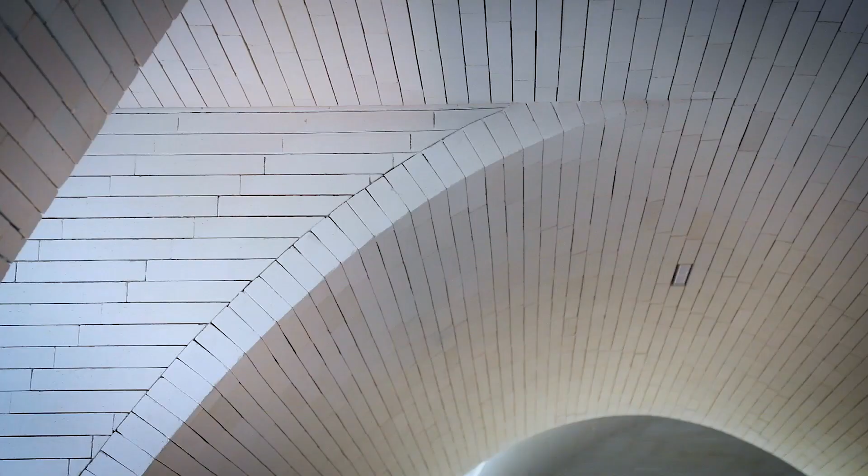Hi, I'm William Smart. I'm the Creative Director of Smart Design Studio. We chose this location because we're very attracted to the conservation area that's just been named.

Within this area, the council is seeking to preserve all the old warehouses that exist at the moment. The building here was originally a factory that made lollies, and we kept most of it. We kept 80% of the building, which we loved, and it's kind of our first principle of conservation, to try and retain whatever we can, and then we built 20% as new.

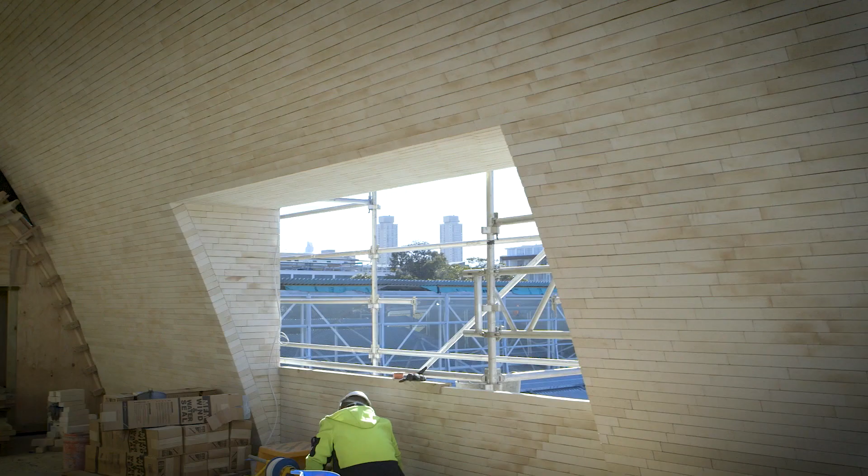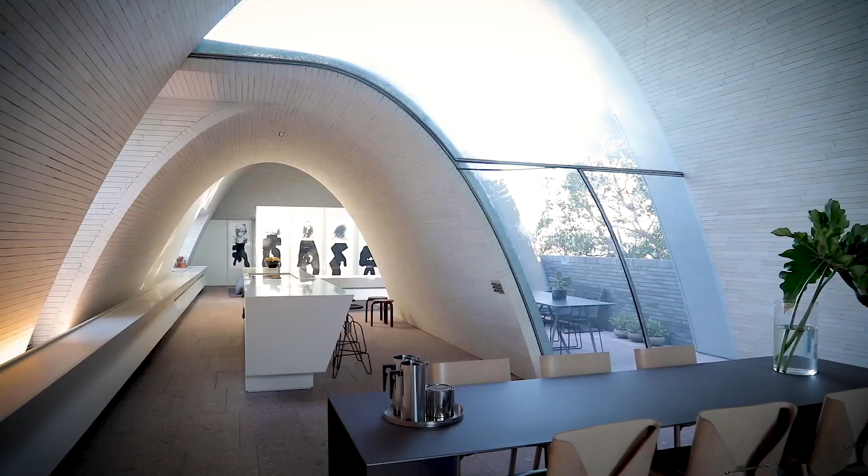Innovation was very important to us, and we also understand that not all clients are people who want to invest in innovation. They want tried and tested solutions. So we sought innovation on sustainability, and we also sought it on structural design.

The shape is called a Catenary shape, and it's the same shape as holding a string. If you were to hold a string, it will form an arc, and the arc is called a Catenary. If you flip it up the other way, so it goes upwards, the pressure that pushes out equalizes with the pressure that pushes down. So gravity is balanced in perfect harmony, and that means that the load of the brick is evenly distributed down to the ground.

My favourite part is definitely our home. I love walking up the stairs and looking through the space at the end of the day. And just recently, I suppose due to the working from home scenario, we've been spending quite a bit of time here, and it's just beautiful to be in.

The light tracks through the space in a beautiful way. It's very quiet. There's a kind of joy to the shape of the room, and I think we've nailed so many aspects of it that I kind of sit here and feel like I'm in a very well tailored space.

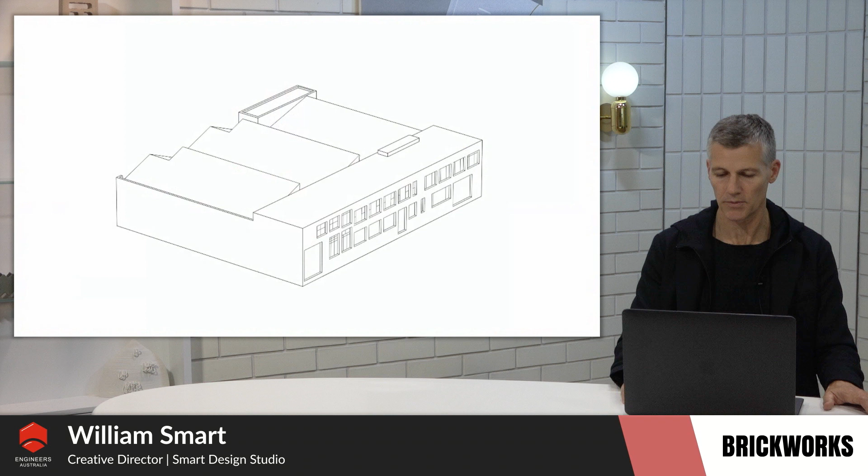We started by saying how much of the existing building can we conserve, which was about 80%, and that was our first sustainability move. The front part was demolished and we removed the asbestos roof and then built a new structure which encompasses the front 7 metres of the building, and then built above that a brick vaulted roof.

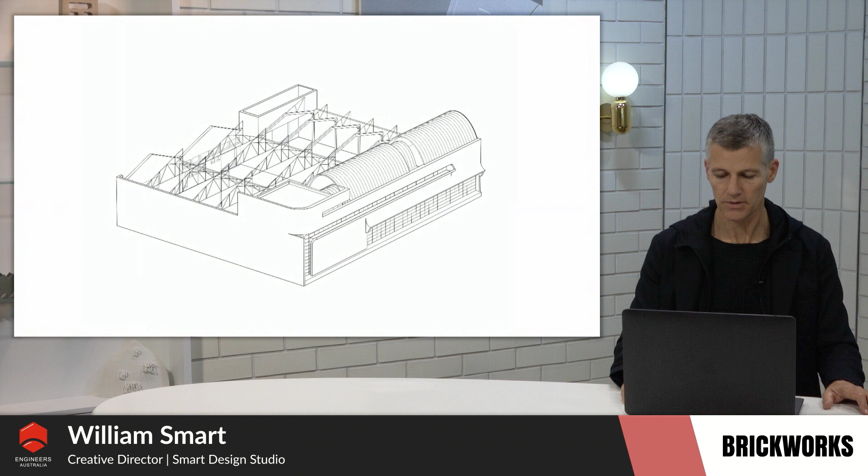Then a new brick skin on the front face of the building, clad with a metal roof sheeting and multi-pane steel framed windows, a new highly insulated roof and 260 solar panels that make enough energy plus more to run our studio.

Together we have a cohesive building where the idea is to form a new interpretation of an industrial warehouse building. I'll talk to you a little bit about the design of this project.

We always start with sketches, trying to imagine the space, what is the atmosphere that we want to create, what are the opportunities, and we search for the architecture that we want to create. In many situations, this is designed from the inside out, which is our philosophy of design.

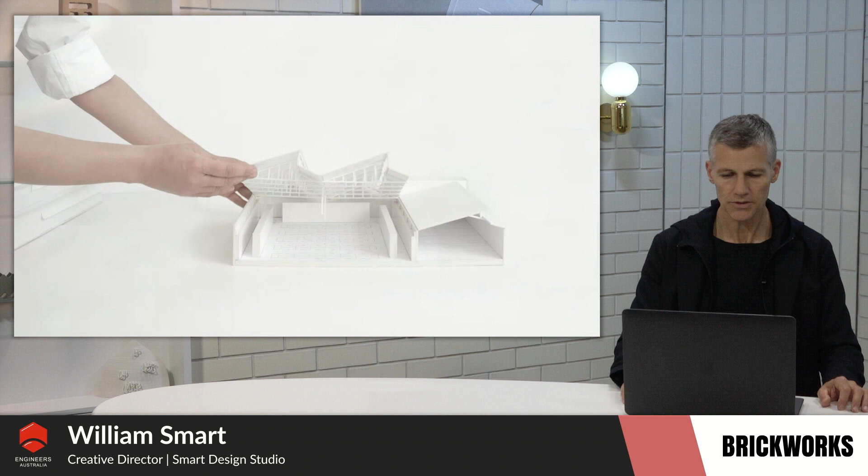So we make models as well as sketches, and these models are used to distill the ideas and to bring them to life in 3D.

Through the course of a project, there are many, and they're often used to talk with the builders and other contractors about the ambition for the project.

One significant part of the roof of the project is a catenary-shaped roof made out of brick, and the catenary shape is that which a chain forms when it falls. When you invert it, the chain will perform in the same way, so it's a perfect equilibrium where the compression of the bricks is transferred to the ground and it holds its form.

We use this catenary shape in two forms, a large and a small vault, to bring light and to form the enclosure of the apartment over the top of the building.

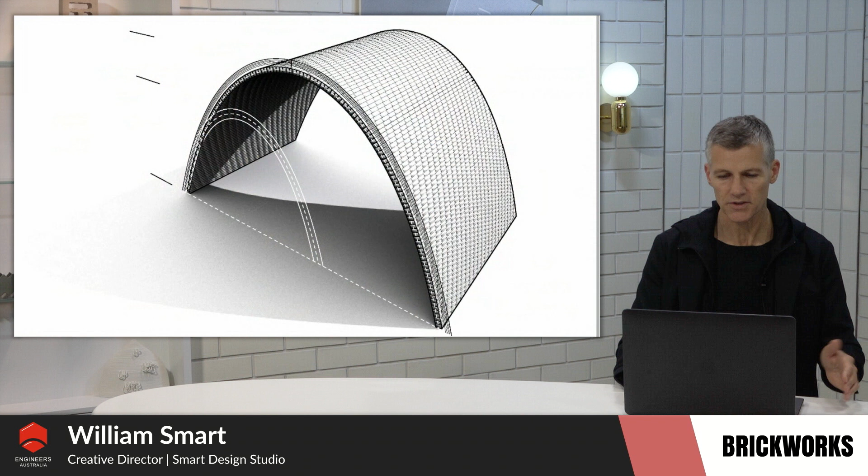To develop this in detail, we collaborated with UTS, who have experts in parametric modelling. So we developed the perfect prototype shape, the perfect catenary shape, and we also developed the offset of the bricks through this system, and tried to work out how we would build it.

Sketches such as this formed a part of the tender package. We brought builders, engineers, and UTS experts to the table to develop the design, so a lot of hand detailing on our projects that work out exactly how it is to be built.

So very large volumes of documentation. And building it was really fun. We wanted to enjoy ourselves in that process.

Just a little bit about the construction. We collaborated with UTS. They helped us also to CNC cut all of the plywood panels that we use for the false work. And this is a little bit about cutting them.

You can see here that the plywood is notched to receive the purlins, which meant we didn't have to nail those elements together when building the vaulted roof.

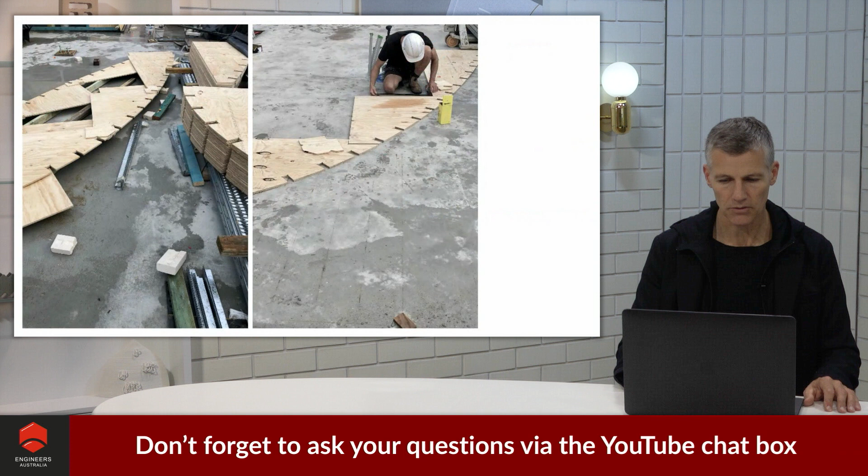These panels were cut out in the most effective shape, so we were able to get more than one panel out of a sheet, and then nailed together on site, and then formed together and plywood laid across the top to create the shapes.

I'll show you more of that later. This is the first thing that we made, a prototype for the project. You can see the bricklayers here laying the brickwork over the top of the prototype form.

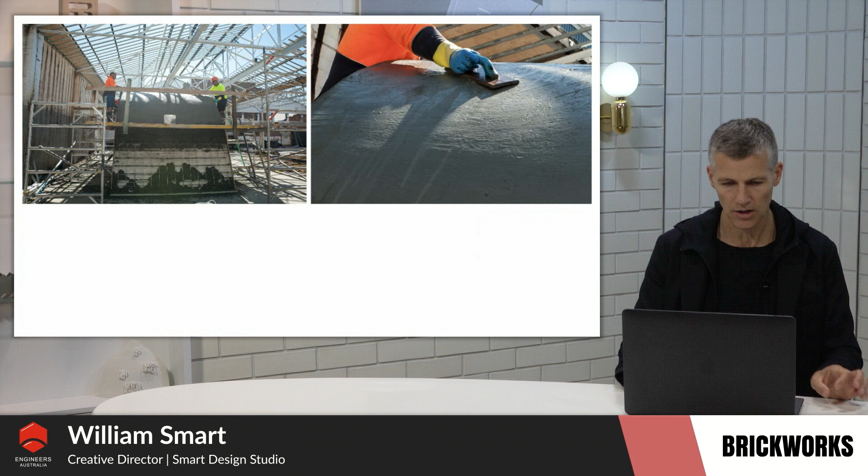And then we put a thin layer of reinforcing over it and then shotcrete the surface. So the prototype had 110 bricks, 60 shotcrete concrete, and when you strip it, this is the formwork shape that we create.

We then really started to develop this, and as the project developed, worked on other parts of it as well, and then took that prototype and demolished it and took elements to a UTS lab to check the strength of the binding between the brickwork and between the brickwork to the concrete, to check that adhesion.

It was also useful to demolish the prototype to see how the bricks would perform if we hit it with a large piece of equipment like a front-end loader. It really performed very well.

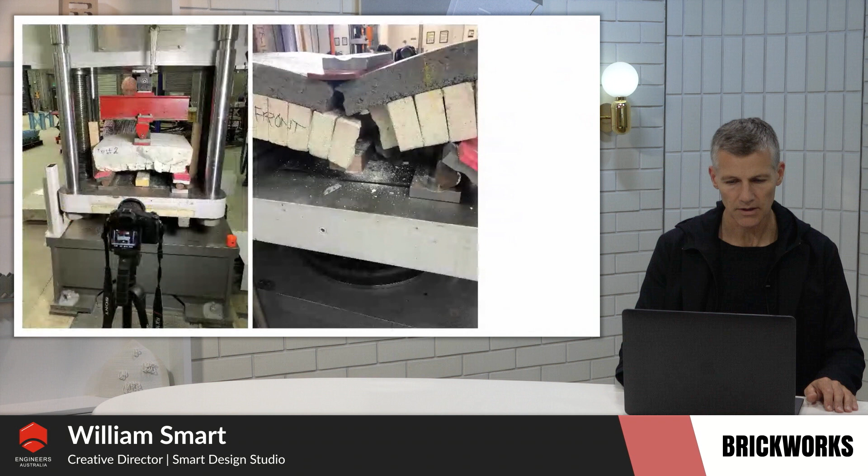At the UTS lab, crush testing was done, and this checked the adhesion and the point at which the elements collapsed, and then we felt very comfortable that we would achieve a good strength for the vaulting of the roof.

Over the roof form, you can see through here the plywood falsework laid in place and the purlins put in over the top of that. I'll show you a structure here before we laid the plywood across the top to form the shape that we built the brick vaults from.

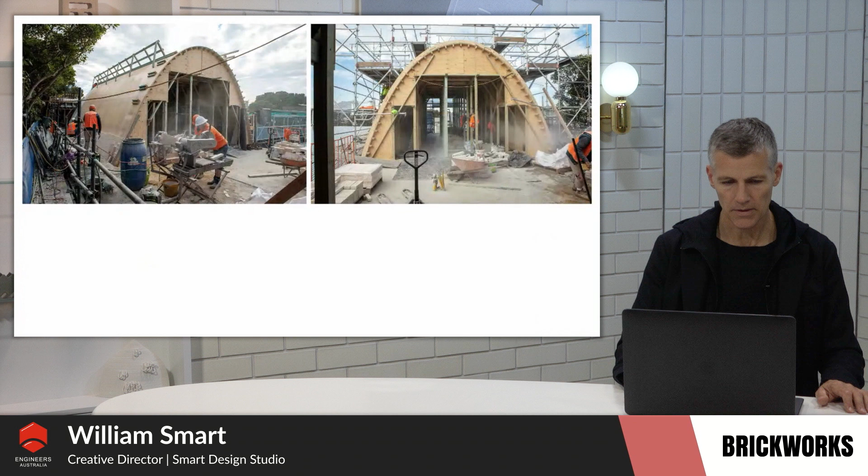Then the bricklaying is coming up over here on the real vaults, so these are 4 meters high. And then you can see the bricklayers here working.

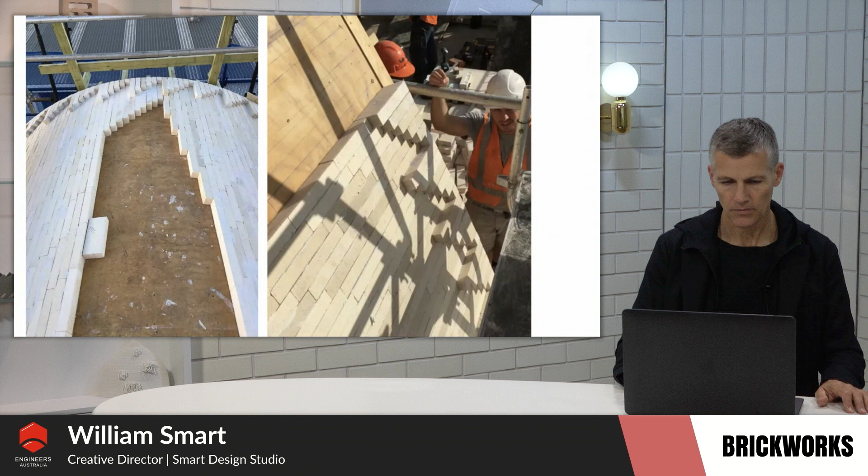And then as they build up over to the top of the vaults, you can see we're starting to prepare the next vault for the building by hammering in the purlins over the top of the CNC-cut plywood.

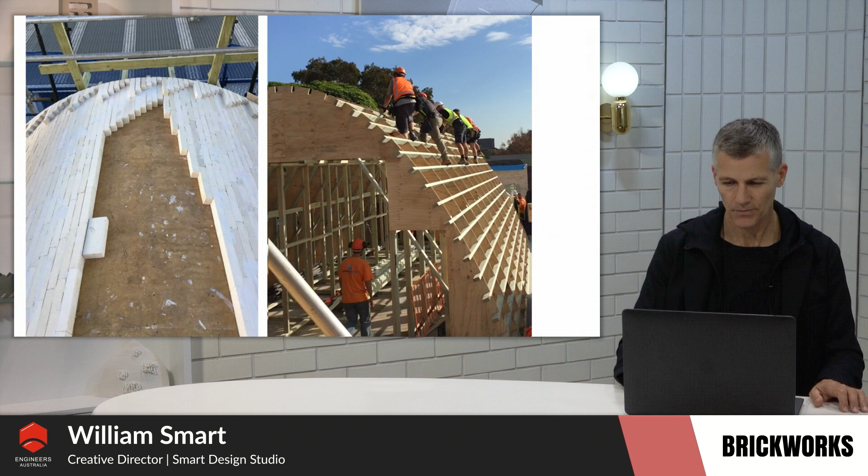And again, it gets sprayed with shotcrete. It's very hard to see in this situation, but it's sprayed over with concrete.

And then later the falsework is removed to reveal beautiful big vaults open to the sky on the roof of the building. Other elements are then introduced, such as windows that span to make vertical windows that can take blinds in the future building. The joints between the two vaults are quite critical and are beautifully formed.

On the left you can see the layering of the building: the brickwork, the concrete, and the insulation and plywood that goes over that. And over the top of that, again, we add a standing seam galvanized roof.

So you can see through here the elegance of it is the slimness of the form and the detail that's worked through with the bricklayers and getting the coursing right. One thing you can see on the left-hand side is the bricks are laid with offsets of 50 mil, so you get these 45-degree lines. And all of the bricks are glued together using tile adhesive rather than conventional mortar.

On the outside, however, we use conventional mortar, and this is a little bit about how we created the curves for the building. The purpose of the angle here is to hold the radius of the brick to stop it from slipping. Because it's faced on both sides, we can't put a permanent centre in.

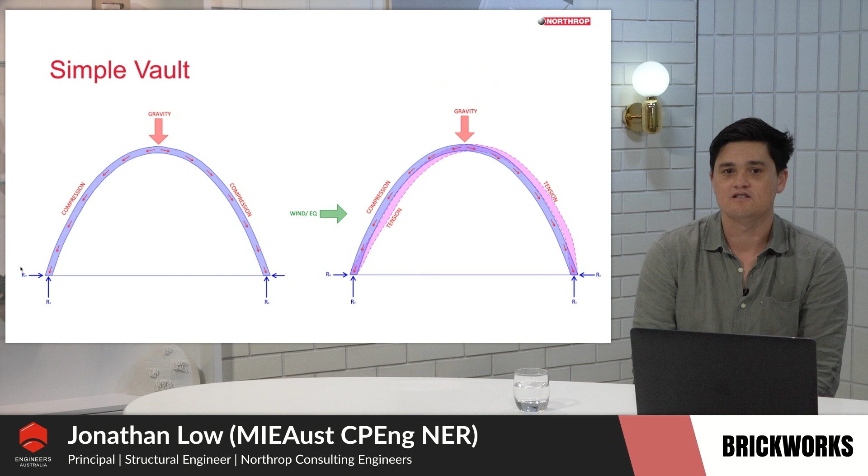As building designers, we start to need to consider other effects on this arch from lateral loads, like wind and earthquake. As our arch experiences these lateral loads, we induce bending, and the shell of the arch goes into flexure. It's our job to make sure there's no net tension in the arch, so there's nothing there to cause a collapse.

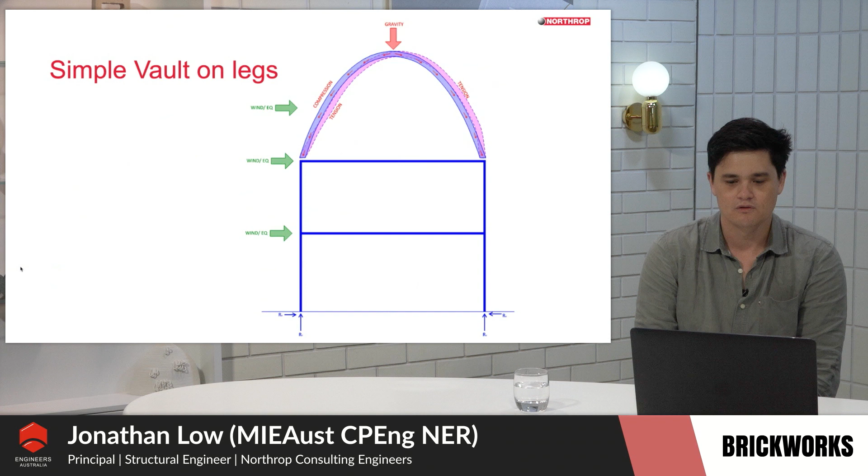Taking it to the next step, we've got to look at our arch more globally and see where it sits within the structure. In our case, the arch was sitting on level 2 of what is essentially a steel framed building, so we needed to consider the additional accelerations that this arch experienced due to the behaviour of the steel frame.

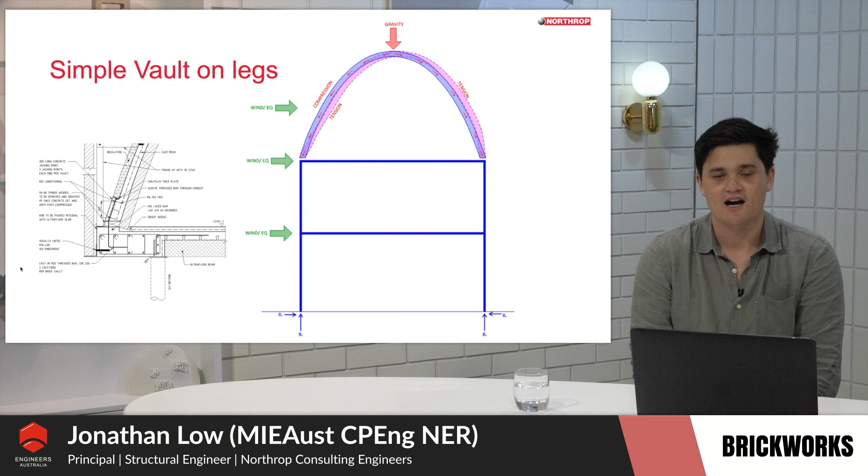Still at this point, we're thinking this isn't so bad—we've just got to make sure we're keeping all of the elements in compression. One of our original ideas, in the tender design, was to post-tension and put some pre-compression into the arch using a series of jacks and straps over the top. By the time we got to our construction drawings, we abandoned this idea and just added some extra self-weight to the arch. Often it's actually the simple ideas that are the best ones.

Again, we felt we were in a pretty good position—nothing was too complex. But unfortunately, William was selfishly wanting to have some windows in his apartment, so we had to start looking at a few openings in these arches.

This slide shows 4 of the scenarios we had across the apartment, showing some of the windows introduced into the vaults. In some of these, the windows ranged from 900 wide right up to 4.5 meters wide.

In some instances, the ends of the windows were supported by the adjacent piece of arch, which was not too bad. In other instances, we had the end of the window supported by a steel plate column, which started getting a little bit tricky, but it wasn't too bad.

In some instances, the end of the window was hung from another arch. And in some really interesting instances, the end of the window was hung from a slab, which was hung from another slab, which was cantilevering off a 3-story unreinforced masonry cylinder, hanging off the hopes and dreams of a structural engineer. At the end of the day, we found this project was one where a typical detail just didn't exist.

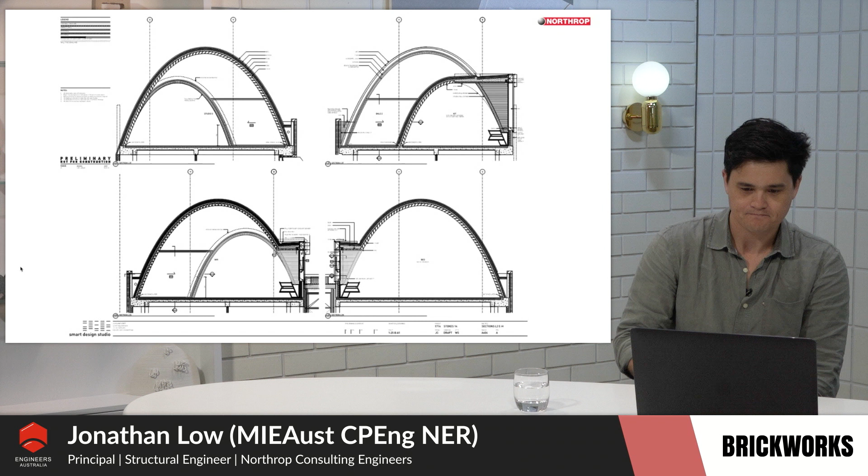This is a picture of one of our structural drawings, showing the different scenarios we were looking at from an analysis point of view. Sometimes we had an arch with an upstand, sometimes a very simple arch, then we had 2 sizes of arches, and then various sizes of windows.

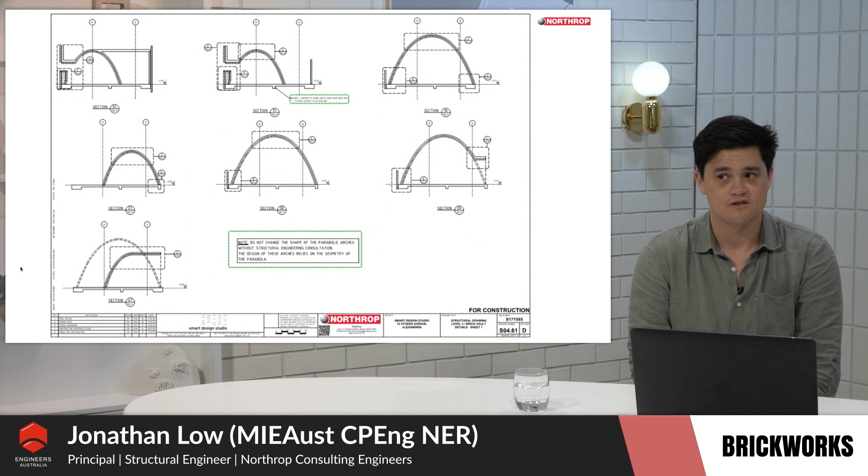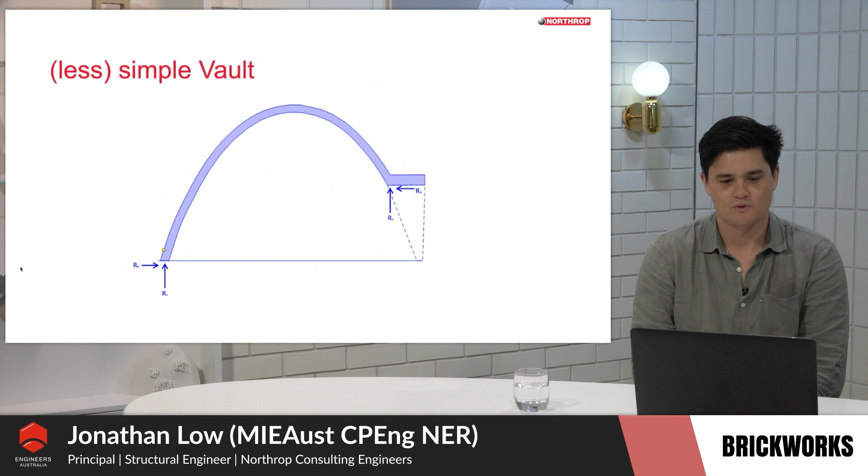This is a quick diagram to show where our arch gets a little bit more tricky, where some of the reactions are. I call this the igloo picture, but it starts to show how the arch got a little bit more complex.

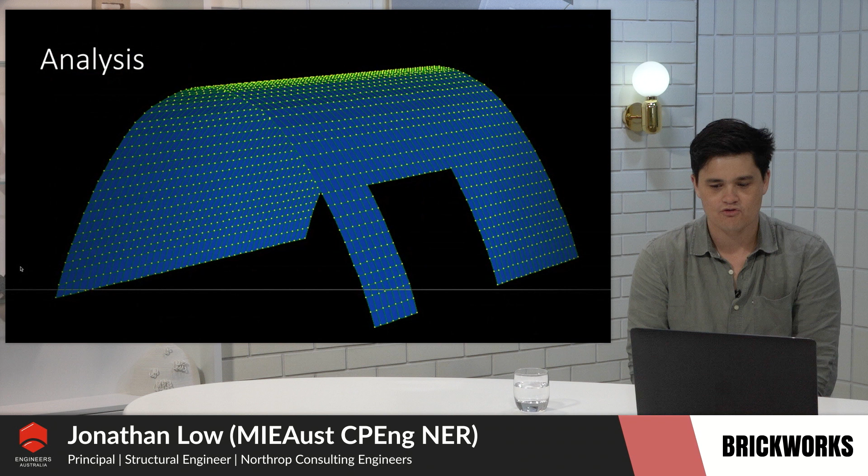We analysed the arches using Strand7, a finite element package, starting with the very simple arch and then introducing the openings into it. With the analysis, we only modelled the concrete shell sitting on the outside of the bricks, then added back in the self-weight of the bricks to help with the compression in the arch. This screenshot is from our typical 4-metre high arch with the opening cut out of it.

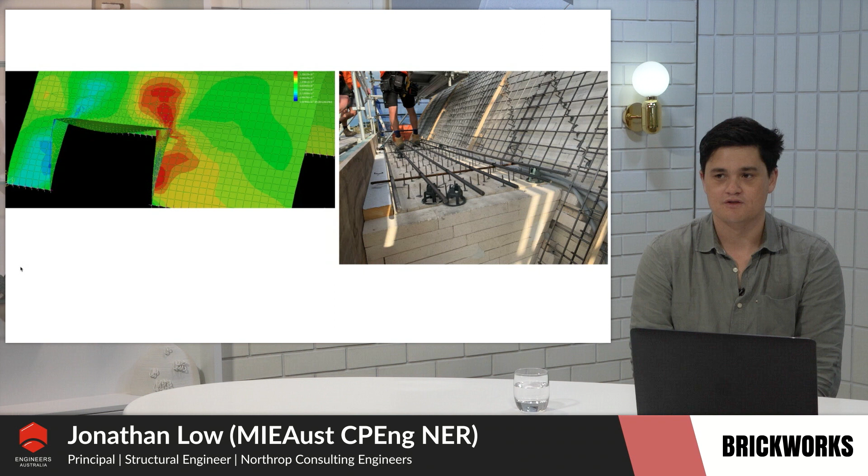We then introduced a little more complexity into the models to analyse how the loads and stresses navigated their way around the window openings. The photo on the right is the little wedge shape at the right-hand end of that window, and you can see the reinforcement that goes over the window hood—but this is before they've added the reinforcement for the wedge-shaped triangular concrete column down the side.

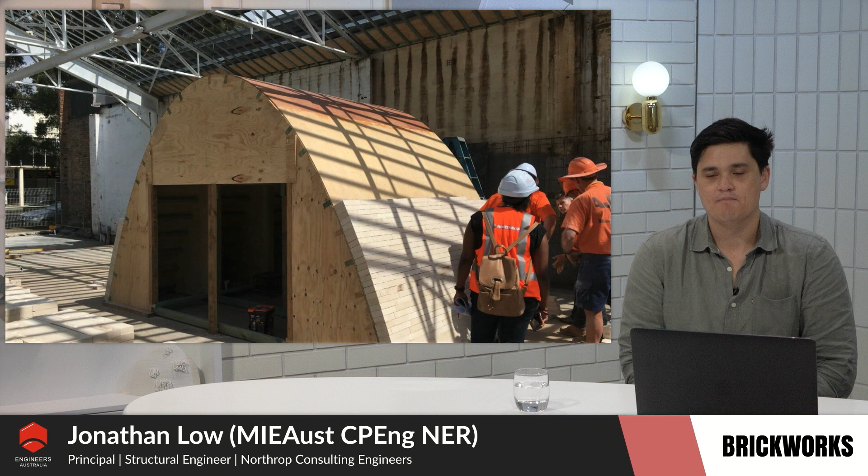I think William's already mentioned the prototype arch that we built down on the ground floor of the existing building. From my perspective, this was probably the most important thing that we did as a design team and as a construction team for this project.

There were a few people who had a half idea about how they might build it, but this was really a testing ground for some of the finer points. How do we build the arch? How do we build the falsework for the arch? How do we remove the falsework from the arch? And even some of the more basic things from the subby's point of view - how are we actually going to shotcrete this? How are we going to finish the concrete? And the list goes on.

We really learnt a lot from this prototype, and I think, at least for myself, it gave me a lot more confidence in the build quality and also the robustness of the structure itself.

There were a few photos in William's presentation around the demolition of this prototype, and from the builder's point of view, it actually took a lot to knock it over.

So I've thrown this photo in, apart from it being me in a pre-COVID body, I just wanted to give everyone an appreciation of the falsework system. Quite a lot of engineering went into the falsework system itself. The site foreman, Toby, actually had a bit of a past in boat building, and I think that shines through in how the falsework system goes together. There's a lot of considerations around how much workspace we need underneath so we can continue with the build. And as William mentioned, UTS really helped us out here with CNC cutting of all the falsework plywood.

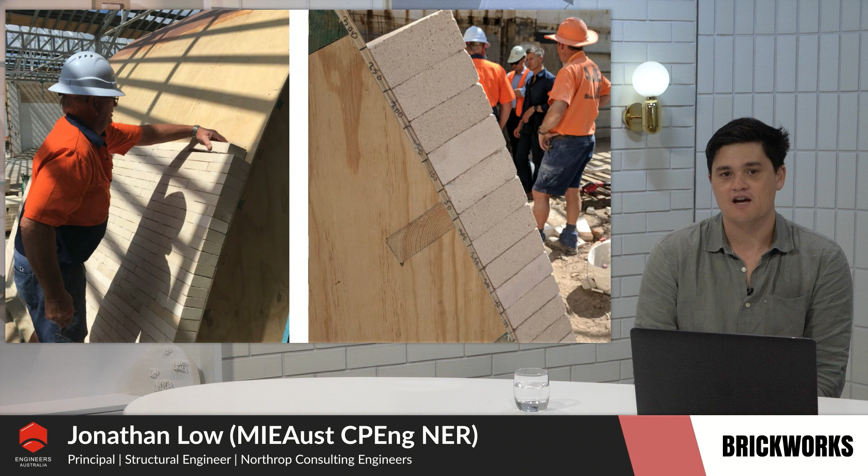We noticed, having had a look at a sample of the bricks, that the height varied up to 2 to 3 millimeters, so the bricks started to wander over the course of 10 courses of brick. So on the falsework system we actually had every brick course marked out, which gave the brickies an opportunity to shave down bricks every few courses just to make sure we were still on track.

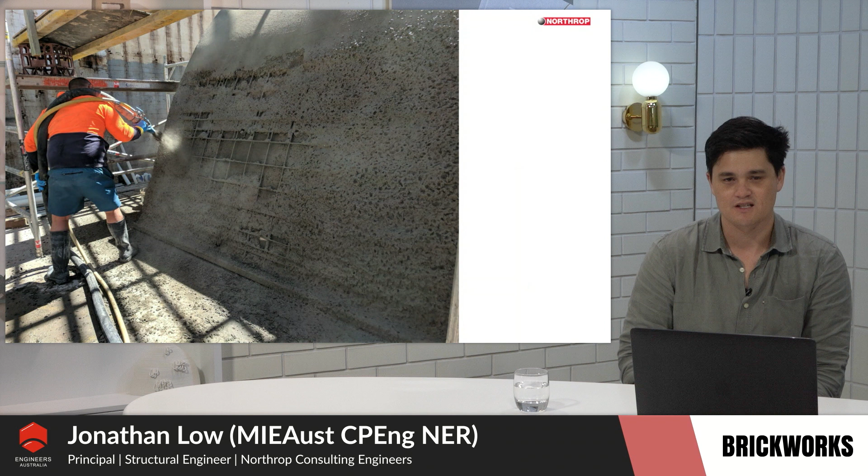Here's a great shot of the shotcreters working on the prototype. This was an interesting one - they had to work out how they were going to actually spray this thing. On one side of the arch they sprayed top to bottom, and on the other side they sprayed bottom to top, just to see how it was going to work and how they were going to finish it. They also mucked around with a few different mixes to see what was going to be the easiest to finish.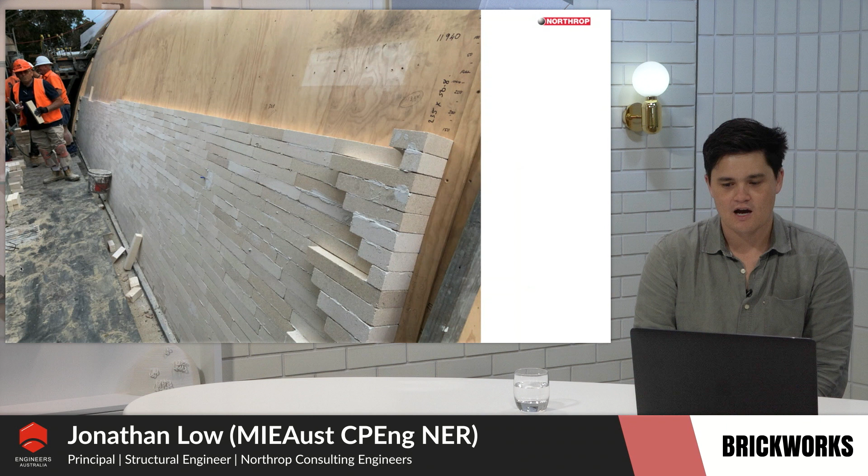On the prototype arch, we actually built a one-to-one scale model of the smaller arch, which is about 2.8 meters tall. On that model we used a 110 brick and a 65mm concrete shell over the top, to effectively scale down the slenderness of the concrete shell for the larger arch. On the larger arch we flipped it around and used a 65mm brick and a 110 concrete shell. But in this photo, you can see that to give that illusion of having a really thin concrete shell and the normal 110 brick, we actually used 110 bricks right on the ends of each of the arches.

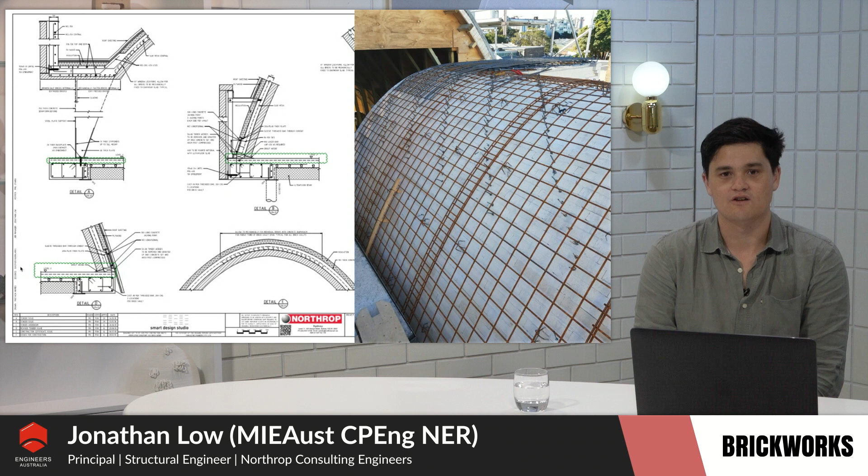So we've built the prototype now. Once the builders and their subbies had a chance to learn a few things about how they were actually going to build it, we set about trying to learn a little bit about how it was going to behave in situ.

Qualitatively, we found these bricks to be quite chalky. If you really gave it some, you could crack these bricks in half with your hands. So we found that the bond strength between the concrete and the brick was actually stronger than the brick itself.

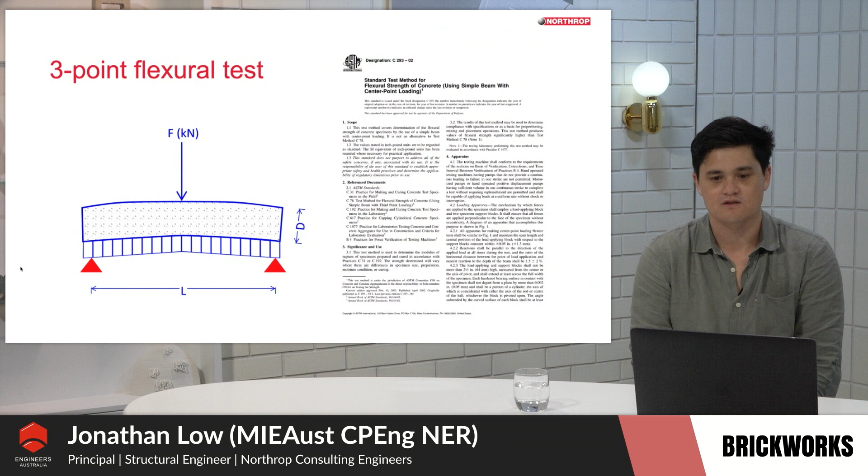On top of the qualitative testing we did on site, we wanted more data on how this thing was going to perform. We'd been working with the architectural school at UTS, then the engineering school at UTS, talking about different ways to test the prototype. We found some standardized tests through ASTM and decided to conduct 3-point flexural tests with the lab at UTS.

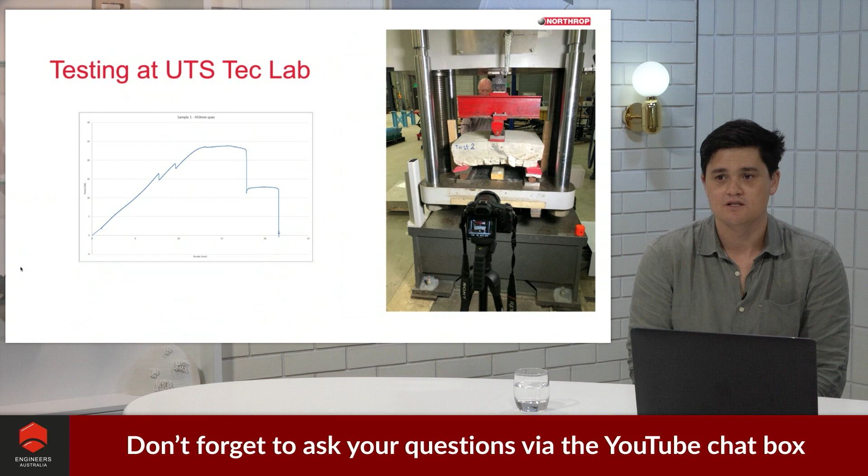We got these samples taken down to UTS, I think there were 3 samples, each weighing about 120 kilos. Using their 200-ton machine, we carried out these 3-point flexural tests. The team down there came out with some really uninspiring graphs, and we back calculated the flexural strength of the concrete shell to be about 50% more than what we'd theoretically worked out.

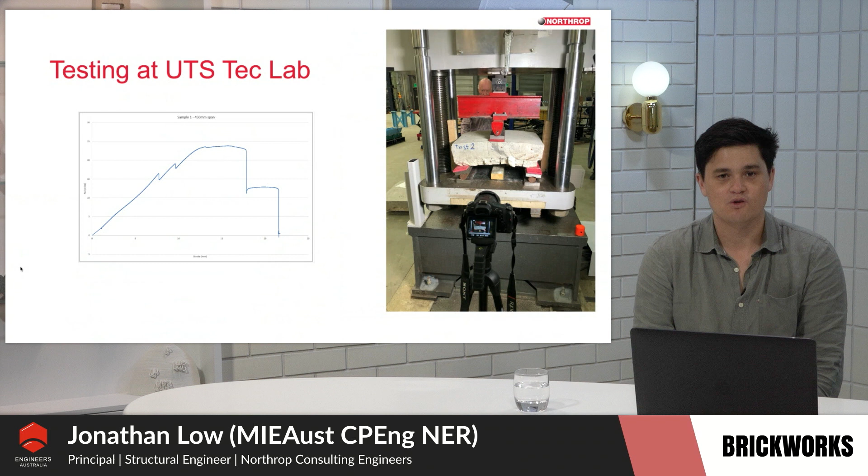That gave us a lot of comfort around how these things were going to perform, and it was probably quite indicative of how difficult the prototype was to demolish. That's just a shot of the UTS Tec Lab down at Botany.

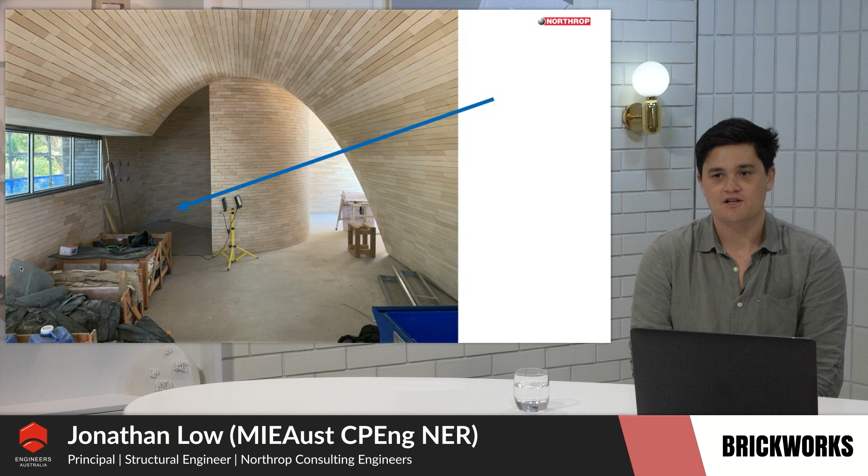This is just another shot of that area. As you can see, the parabolic curve of the arch just follows straight into the top of the stair core and then wraps around into that cylinder. It's subtle, but it's pretty wild.

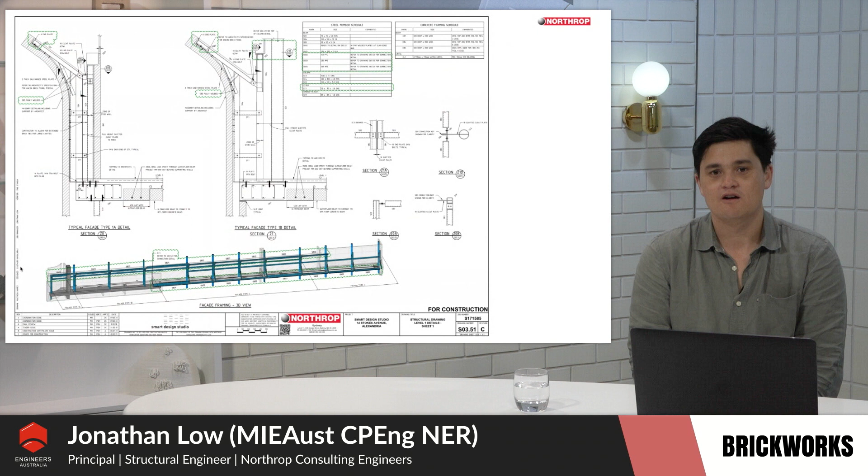So that's it for the arches. I'm going to talk a little bit about the curved facades. This is one of our structural drawings, just showing a couple of the different scenarios we had for the facade. There were basically 4 scenarios.

The next scenario was what we called the little half crescent moon, and then the skirt where it peeled away from the building at the lower end.

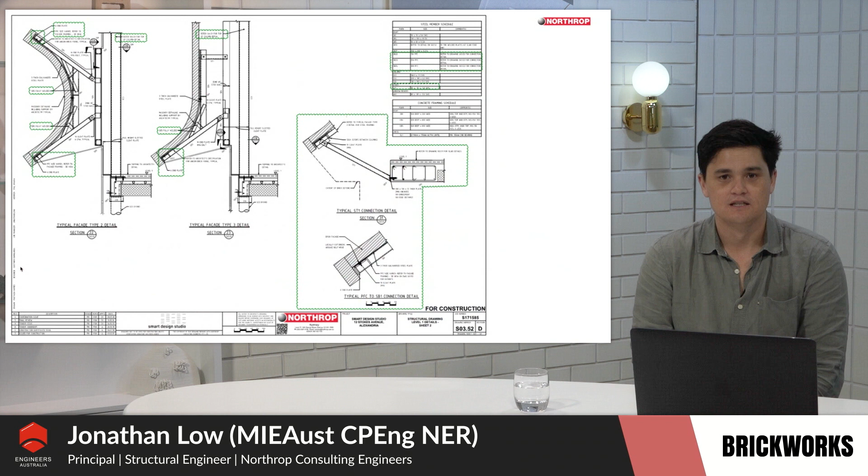For all of these, we designed a secondary steel structure that came off the primary columns, and between the columns we had this secondary structure that was picking up a fair bit of torsion due to the eccentricity of the brick weight. A couple more photos here.

This shows the skirt detail where the bricks are peeling away from the building. This was probably the simplest version, because you've got the bricks supporting themselves with an angle at the base.

The other interesting part about this detail was how that bottom course of bricks, which was underslung to the steelwork, was connected. We tossed around a few different ideas, and in the end we landed on using stainless steel, basically making up modules of bricks, I think 8 bricks at a time, using a stainless steel dowel, and then lifting that up and securing it to the underside.

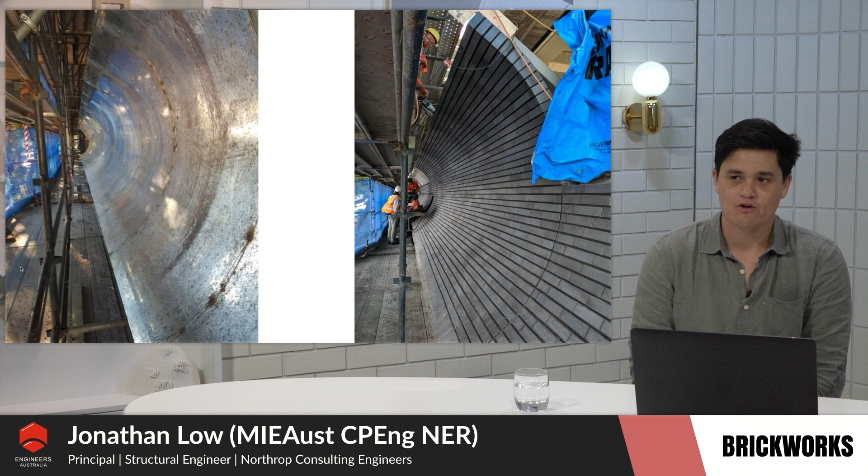These are a couple of photos of the galvanized sheet that was affixed to the secondary steelwork before and after the bricks went on. As you can see, the brickies on this job were absolute masters. Once you got about two-thirds of the way up that crescent and it started peeling away, there are mechanical fixings back to the steelwork.

So to wrap up, I just wanted to go through my 3 takeaways from this project. First, and this is not what a structural engineer would normally say, but it's okay to not know what you're going to do at the start of a project.

We started working on this project, and it was really not clear to us how we were going to design, let alone build, some of the elements on Stokes Avenue. Despite enormously underpricing the job through not understanding the complexity of it, it was a really great example of a project where we were learning from each other on the way through, and learning from the people, the whole team.

Second takeaway is that good ideas come from around the table. Like I was saying earlier, I actually think some of the best ideas came from the subbies and the guys who were building this.

I've almost no doubt that a structural engineer would never have proposed using tile glue to solve a structural problem. But as soon as Gareth put it out there and we talked about it, we realized it actually solved several problems, buildability problems, structural issues, and it really moved the project along. The thing there is you need to leave your ego at home and just go into these things with a really open mind.